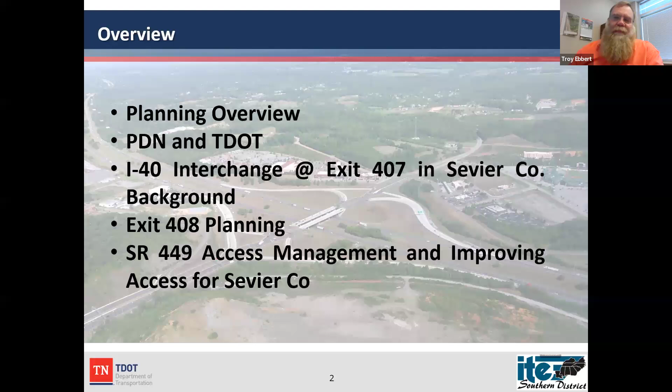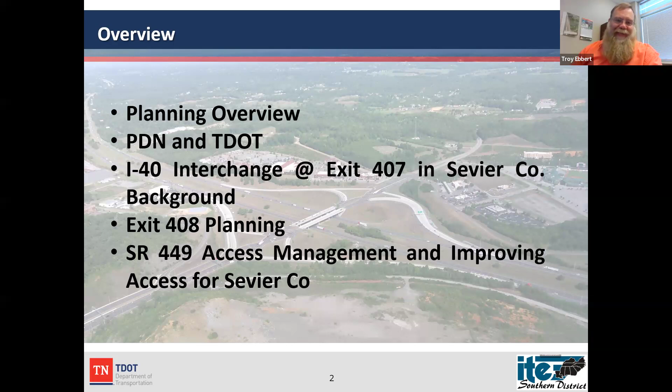So we'll go through this, and if you do have questions, feel free to pop them in the Q&A or the chat. Todd and I will take a peek at those as we go through. In this presentation, I'm going to give you an overview of TDOT just for the Southern District, give you an idea of how we're now organized, where planning fits into all this, and then we'll go through and talk about our project delivery network. Then we'll get a little more in depth on a specific project and how it's morphing into planning for the next project, and then how the locals are actually helping us and collaborating with us on maintaining some of this — that would be the access management part. So it's four different topics we're going to roll through.

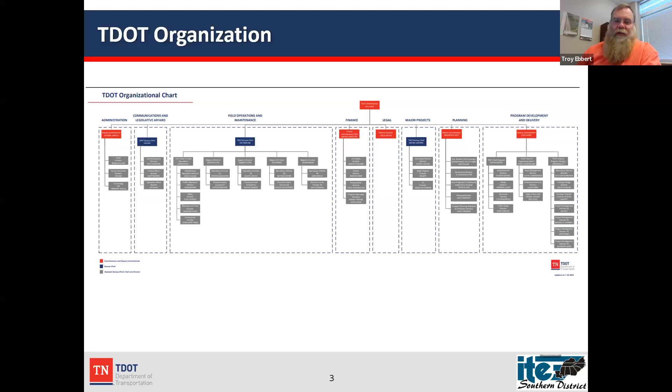This one is specific, Preston Elliott is our deputy commissioner. I am under this part, which is under our planning director, Matt Meservy. Under planning, we also have aeronautics, which was our newest group added during our reorg.

We have our Assistant Bureau Chief, Dan Pallme, who's over Transportation Rail Freight and Public Transportation. Most of y'all probably know Steve Allen, who's now running local programs. They took his division, made it a little different, still looking at community investments, and local programs was slid over there with him. Then we also have our strategic planning, research, and innovation group, that's Julie's area, where our PMs and research division are located under planning.

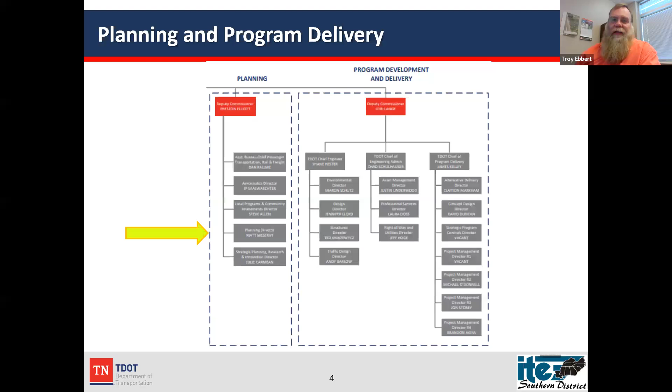So with that, we have IPD and PDN. Okay, we love our acronyms. In the lower right-hand corner, you'll see the QR codes. There's a few of them in here, and I'll leave time up if y'all do want to go to that. That one specifically would take you to the PDN page, if you want more information, more detail than what I'm covering, since I only have a couple minutes to go over each of these.

With IPD, or PDN, the Project Delivery Network, this came out of a commissioner who came in as deputy governor, and he saw issues with how delivery was going. We'd get partway through a project and have to come back and work through these issues. It was very inefficient, taking an average of 15 years to get a project from the very beginning in planning all the way through to the point where we're actually beginning construction. That was too long, and he did not like how that was going.

So this was developed. The more traditional way we did things before, you have your required planning documents, then it goes to design, then to right of way. Somewhere in here, sometimes you'd have a new mayor, or a new vision for the community, and now they need this. Because you may be 6 or 7 years into this point, we've had scope creep, we've had issues, and now we're going to have to come back and do it again.

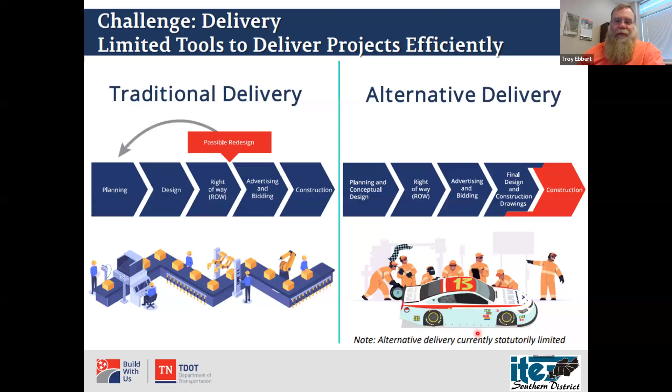Of course, you can't talk about any major development without talking about silos. We're a big agriculture state, but at the same time we get into these silos where planning's doing their thing and moving forward, then design does their thing, then it goes to construction, then maintenance. Maintenance is talking to design about why they did it this way, because there's no way to maintain it. Planning's saying, well, we needed to add this in as well, we needed this particular sidewalk, or the community wanted this, or we have a mayor now more concerned about XYZ instead of what we were originally planning.

A lot of that had to do with time, and of course the longer the projects go, the more expensive they get. So we're trying to deliver projects much faster, much more efficiently, and stay on time, on task, and in scope.

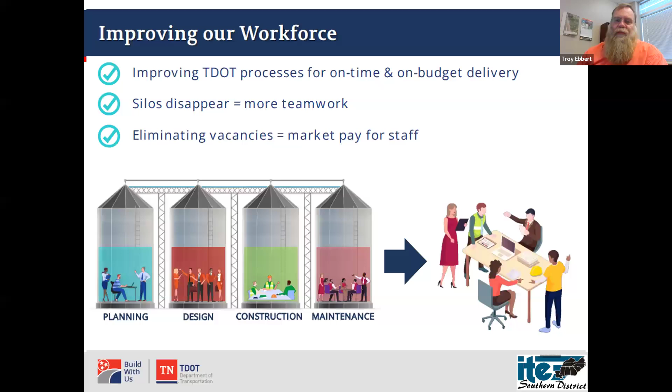So how it was done is we took these silos and rolled them into specific project teams. Now we have a project with technical specialists that go along the whole way through the project. Before, in the more traditional sense, planning would go through all the planning documents, whether within an MPO or outside it, like a bike-ped plan or a corridor plan already in place. Planning would make sure the designers had that, and then designers would take off and run with it.

Now, planning goes along with the project manager the whole way through the project, up to the point we're beginning delivery. That also goes for roadway, structure, survey, all these different discipline divisions that now follow that project the whole way through with the team. So you've got your PM, and then you have the project.

On that project, you have a specific design lead. So if it's a roadway project, typically your roadway design is the lead. If it's a bridge, structures is going to be the design lead. And then you'll have your technical folks coming along with this the whole time.

So if we're working on that road and we know we have a bridge, they're going to be part of it. Survey's already talking to roadway about it, environmental is getting looped in because we have a stream and we're going over structure, right of way is saying here's what's going on, and utilities gets involved. This is all done early because we have pipes hanging off that bridge that are going to come down through here, and we're going to need additional right of way because of slopes. All that's being attacked at the same time and really worked together.

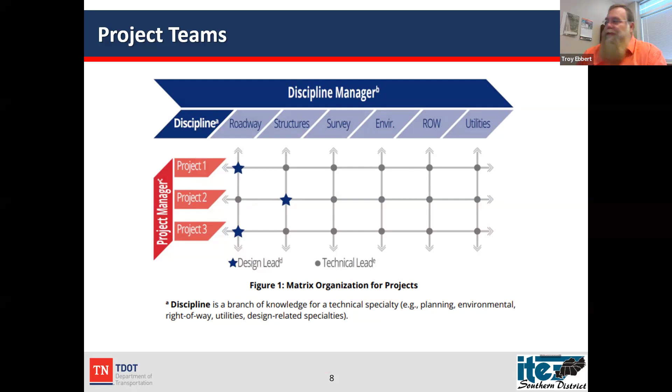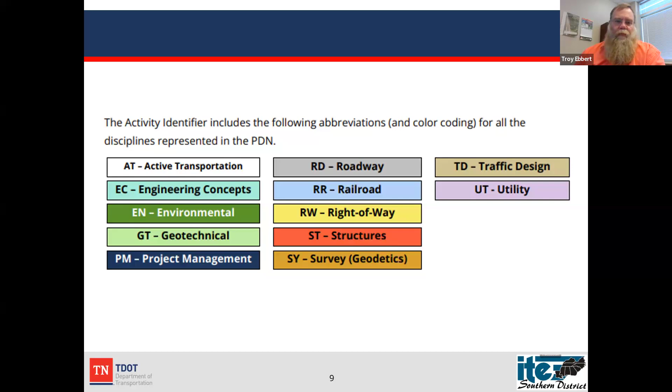There are very specific outline documents that we have to go through as a project manager, and we have templates that are all available online as well. We go through step by step the whole way through one of our projects to get that project from point A to point B, basically from that scoping meeting where we have to scope it and make sure we're right, and then the whole way through to where the right of way and our footprints are there, we have plan in hand, and then we have the PS&E that actually gets moving through. But there's also public meetings during this to gather information.

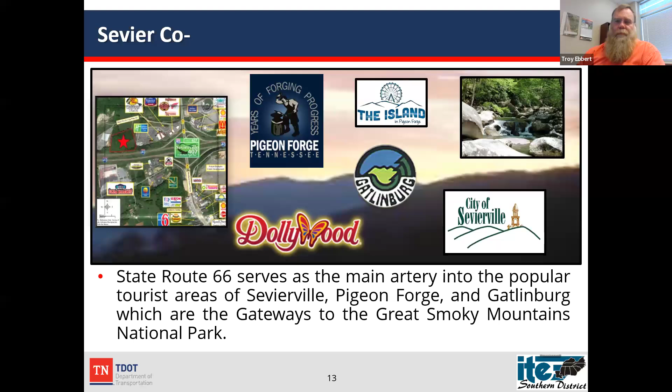So we're going to get into the study part a little bit, and this is more on the traffic engineering side, so y'all are going to enjoy that. There are some numbers in here and a few things. Actually, some of you on the call now actually participated in this as well.

A couple things we're going to focus on: this was a diamond and it had a loop in it, and you see the volumes we had coming up through here. As far as land use, because we're looking at both of these, this is currently vacant in this photo. Bass Pro, a large shopping area here. There's a baseball stadium here. This comes down to a flea market and some other areas, which all kind of come together just off the end of the ramps. You can see the level of service we're dealing with.

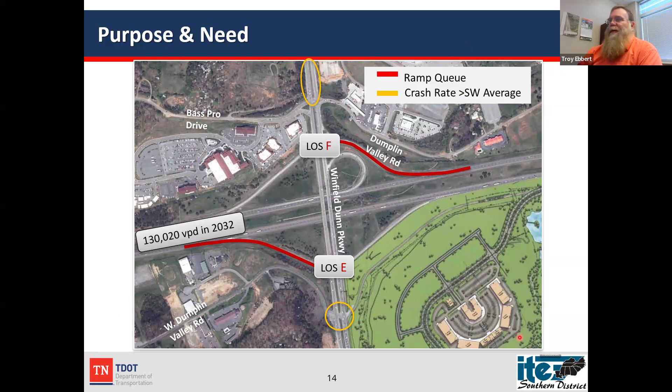And trying to attack this particular project, even on this part, you can see with this diamond, the queuing that's already occurring. We have the heavy tight ramp, and then you have this heavy queuing here. We're also looking at this tapered ramp that comes up, and we have 2 right turns and 1 left that's coming out here, all signalized on your basic diamond.

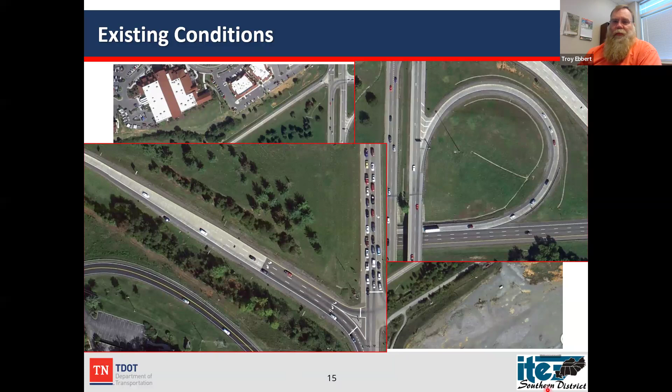Here's some more numbers for you. As you're coming up through here, there was actually queuing going down the interstate. One thing about transportation models and transportation planning, this specific area does not model like most towns or cities. You have your normal 9 to 5 traffic coming in, but your peak times are more Friday afternoon, Sunday morning because of the tourism side. So it creates a very unique challenge in trying to even model this.

We had queues running down the interstate, whether for the ramp or in this particular lane, the entire way down, causing issues anytime you're queuing up on your main line. We had it coming from both directions. You can see the traffic counts here - projected traffic count for 2032 was up over 130,000. We are already queuing out here, and we are only in the mid to high 70s.

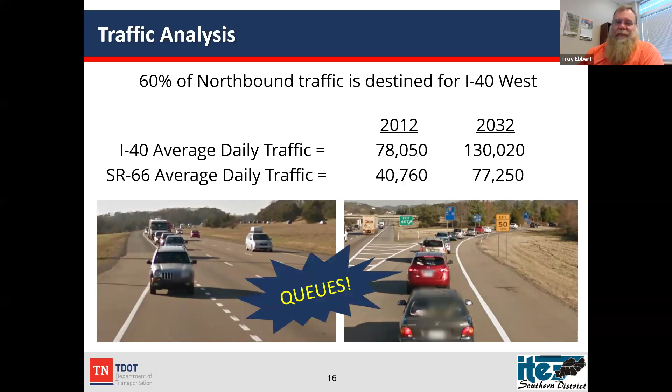So a ramp study was done. The results of the ramp study looked at expanding to be able to control these queues. With these, we were looking at the heavy right - most of the traffic was going towards Pigeon Forge, Gatlinburg, Sevierville, and the Great Smoky Mountains.

That's why you see the heavy right turns, and then the split here to go left up to the baseball stadium and to Bass Pro and some of the other attractions. Of course, the baseball stadium is somewhat seasonal, but they also have events there in the winter, like Christmas lightings and holiday themed events, in addition to the other main events they have.

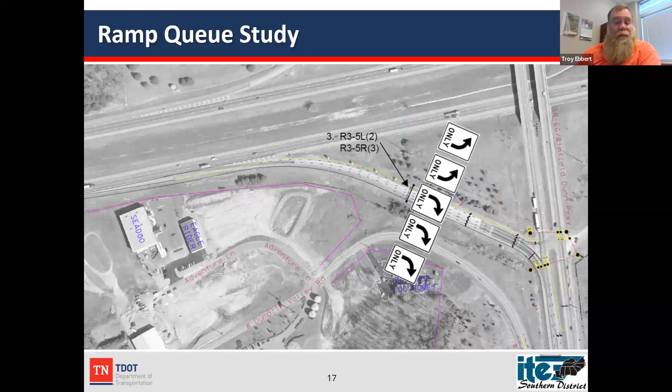So this was working, but we knew this wasn't going to work out based on the ramp queues. So we came through, and again, this is back to our traffic division. They looked at this and looked at a few alternatives to handle this kind of traffic.

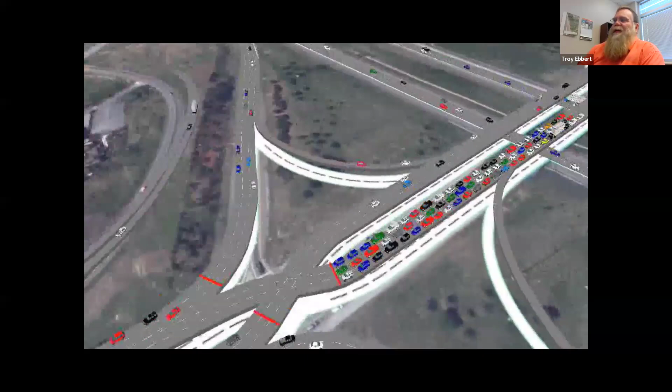This one specifically is looking at the DDI, and this is a very large divergent diamond. And we're talking 2015 - we don't have a ton of them in the region at this time. So videos like this, and there was a lot of outreach going to folks to show them how this is going to function.

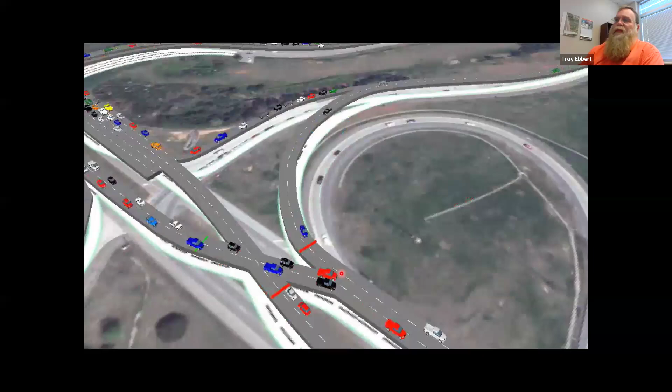You can see the overlay here of the former ramp, how it was working, and then what was done to complete this. You see the additional lanes ended up being 3 going each direction as you go across this.

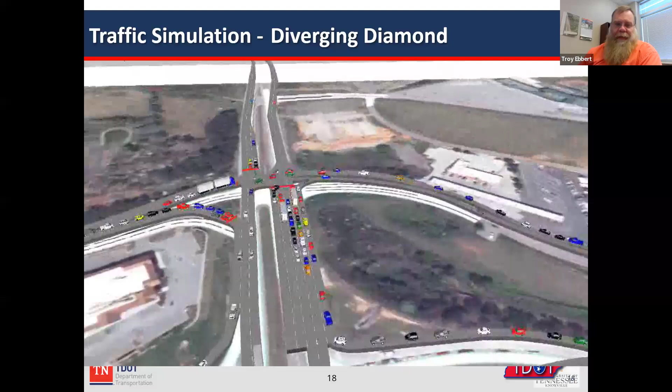And this was a hot topic for a while. Everyone was saying, what in the world is going on here? You get off on this exit ramp, you're going the wrong way. Well, yeah, you kind of are. But once they figured it out, it does function very, very well because of that.

Now with this aerial, we're pointing out, you know, with our cycle we've gone through, the LOS has been studied, it's been adjusted. Now we're going to come back into some land use.

So I want you to notice this particular big empty piece of property right now. We still have Bass Pro heavy shopping over here. This is now growing up with heavy residential. And we have some major growth that will be going on over here at the baseball stadium. Even though the baseball team has moved downtown Knoxville, which is out this way, we have a lot of other potential that's coming up on both of these sides.

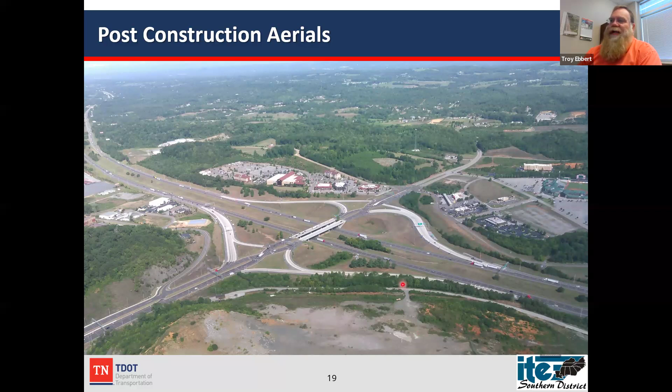So this is working great at the moment. It's not going to continue to be able to last that. We're going to come up with a strategy to try to preserve how it's currently functioning. So this was the timeline that went through on this particular project.

This was not a major corridor project like what we're using with IPD, but this was a heavy interchange improvement. You can see 2014 when construction began. It actually kicked over in mid 2015. So roughly 15 months later, it went from the diamond with a loop to the DDI right before the 4th of July. Everything was closed out at the end of 2015.

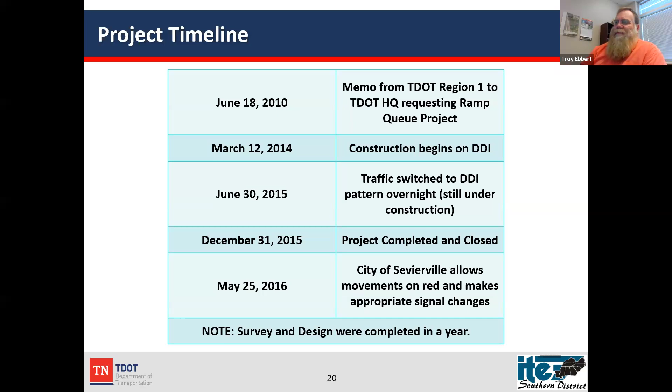There were a few changes the city of Sevierville wanted to deal with, specifically permitting right-hand turns on red versus making them wait for that traffic to go through. And one note here that our traffic division has put in as well is that our survey and design were all completed within a year.

So here's your engineering slide, because I know you all like numbers, and we like to look at these values at the bottom. When you look at this, it's pretty cut and dry.

The total crashes, as far as safety improvements we looked at on this, dropped from 111 to 73. Roadway departures went down - those are your more serious issues. We had a few upticks on it, but the rear end crashes went down. A lot of that had to do with the sweeping turns where you're looking back over your shoulder - you're not having to deal with that as much. And then you just don't have the conflict points because you go from a diamond to a DDI.

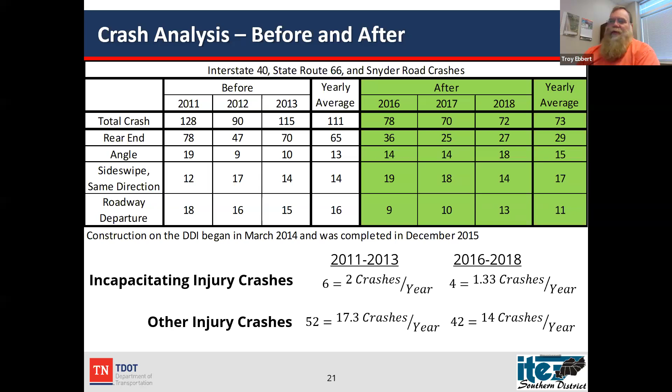Severe crashes dropped from 6 to 4 during the similar time period, as well as the other injuries dropped by 10 during that same time period, the non-incapacitating ones.

So now we've gone around the circle. We had increased traffic - you saw the LOS that was a problem. We needed issues, made improvements, increased accessibility down through here. Now that we have more increased accessibility, land values are already high and it keeps climbing. Well, now we're back to here. So we're doing a land use change.

So that big empty spot that I was looking at didn't stay empty for real long. As you can see, this tiny little gas station showed up - you're familiar with Buc-ee's - but they came through. Of course, they were the largest gas station. This was the largest one at the time until they built the new one in Texas, but being a tourist area, this was a home run for them. They see a lot of traffic.

Now, one thing that did happen with this as well, of course, we have a wonderful traffic division in Region 1.

They heavily coordinated on how to open this up and keep this moving, because down below, what you can't see is it's a new interchange with signals. We didn't have the crazy heavy queuing on the interstate like we did on another Buc-ee's that opened up in a different area that did not have this kind of interchange. This interchange is functioning very well because of a lot of that and the forward thinking of our group.

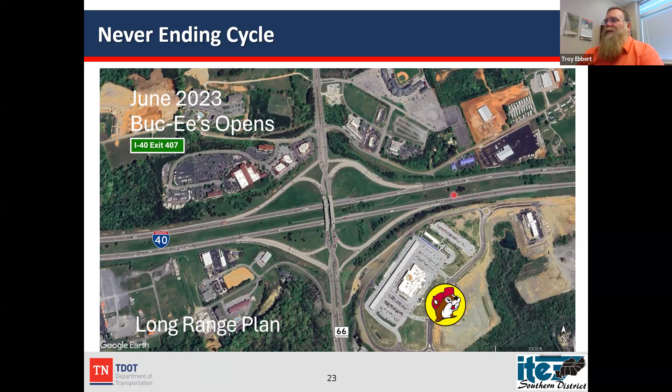So this is an overall arching look at what is going on in this region. Of course, as far as orienting you, this is the exit that we were just looking at. This is State Route 66, which brings you down into Sevierville, which takes you on down to Pigeon Forge and then all the way in through to Gatlinburg and the Great Smoky Mountains.

This road, State Route 449, if you've ever been to Dollywood, you've been on this road, because that's the road you come in and out on, whether entering this way or coming out the other way to the parkway, you have hit State Route 449. State 449 used to be the back way to Dollywood that all the locals knew how to get around through and didn't have to deal with all the traffic out on State Route 66.

State Route 66 is a divided road, 3 lanes each direction, lots of curb cuts, lots of signals. Great for cruising with the rods and the car shows, but not so much on throughput. State Route 449, on the other hand, is more of the expressway to Dollywood and to get about halfway down through this region. It is 6 to 7 lanes, depends on where you are. Some are divided, there are portions with a center turn lane. And I'm going to talk about access management along that here directly.

Because this is already getting full, we have started looking at another exit. So that little road I was talking about here, this is Buc-ee's, and this little yellow line here, that's the future connection to exit 408.

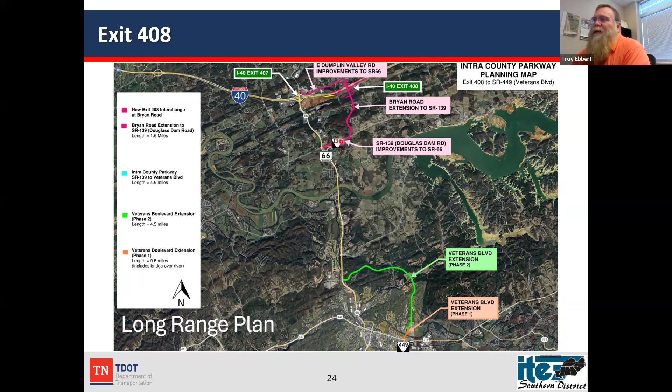I'm going to tell you how we're getting all this and paying for all this here in a minute. And exit 408, this is about a little over 1.5 miles for improvements on this road. And the rest of the story on this is going to be this connector here. So currently, this is what planners love to do, and I particularly enjoy putting a line on a map and letting the engineers figure out how to make it work.

This has been planned, but also has been through some preliminary engineering as far as trying to find good locations, hook up on roads that we already have, and do improvements on those with the least amount of disturbance possible. This is almost a 5-mile road. We'll most likely have a pair of bridges, and these are going to be significant bridges going across here.

This is the final plan, the big plan, overarching plan of what we're looking at versus what has already been funded and what we're moving towards.

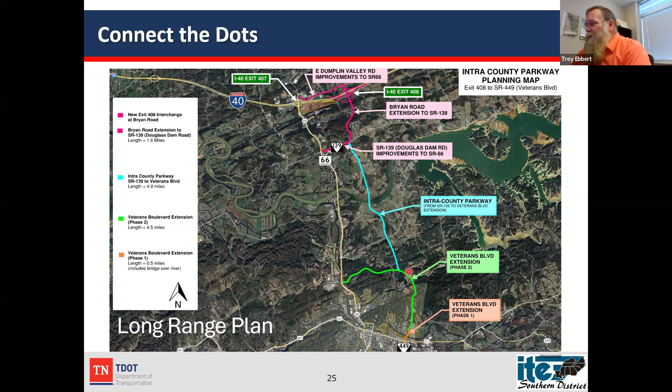So, long-range plan, Sevier County does have a long-range transportation plan. They have a consultant that they've been working with for years, and they have had their plan. They have updated their plan to include these. So their plan includes exit 408 here, and the intra-county parkway, which is this section here.

Of course, the Veterans Boulevard extension, which is this portion. And this is 449, which takes you straight to the front door of Dollywood here.

Then it comes back to 66 and runs in. So you can see the overarching part of this is this road, 66, is still going to be there, but this is going to be a much more somewhat access-controlled right of way and corridor, and we're going to get into that specific.

But right now, some of these projects have already been funded. We're going to talk about the funding as well. So exit 408, that was studied with private dollars. That was not studied with state or federal money. That worked with some of the local potential developments that are coming in or could come into that area.

And the committee, which consists of one elected official and then the city managers, so 5 total. And then the 449 extension here, it is also funded. It is in our 10-year plan for both of these.

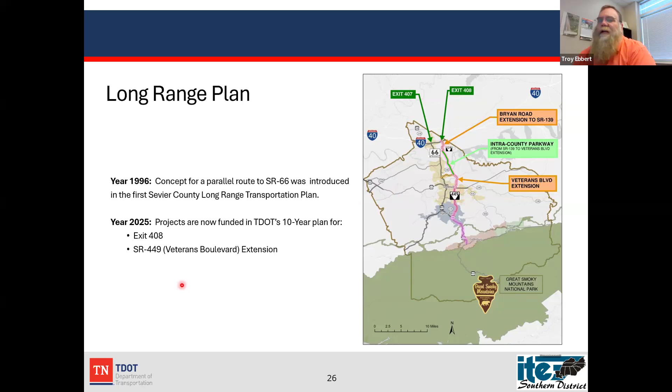And I started getting into it a little bit. How did they do all this? Because money's tight, it's tight everywhere. How are we working through this? So heavy collaboration, obviously great planning, and then this Tennessee, or the TDOT statewide partnership program, are a couple ways that they have tackled this.

So this particular area, if you're familiar with transportation funding, is not within an MPO, so they don't have STBG money that they can work locally on these projects. They do make a lot of tax revenue for the state of Tennessee, and they know it, and they're not afraid to call that in and let them know. With between 18 and 21 million vehicle trips coming through there and visitors, they're spending a lot of money in this region.

So the collaboration consists of the mayor of the county and then the city managers. They get together, and they've been doing this for years, and they have some very successful stories that come out of it. When you're dealing with this many people coming in all the time, you have to have really good basic services.

A lot of hotels, a lot of restaurants, you're dealing with a lot of water. Their committee discusses their water, wastewater, stormwater. They also discuss waste management. What are we doing with all this trash? What are we doing for all the food waste that we have? And of course, traffic.

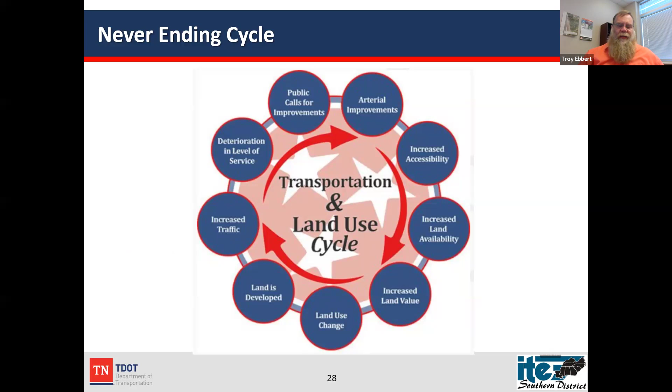But what they have done on that southern section of 449 is they have actually created what's called a corridor management agreement between these cities. These cities work together, they don't fight over development. That's the biggest thing I've seen that's been so impressive with them - they come through and they collaborate. You have multiple agencies; on this particular corridor management agreement, it's Pigeon Forge and Sevierville today. They don't fight over development, they work well with it.

So if a builder goes to Sevierville and says, hey, I want to build this, and they're told no, the builder might think I'll go to Pigeon Forge - but they're going to get the same answer in Pigeon Forge as they are in Sevierville because they're talking to each other. That helps stop a lot of the playing them against each other, because they're all working together as a single entity - Pigeon Forge, Gatlinburg, Sevierville - all of our cities within this realm are working together, we're all rowing the same way and we're making progress.

So what the CMA does is help manage the operations of this corridor. Now it's still a state road, but as far as accessing this road, we're tying land use and transportation together to make sure this specific corridor is protected. We've invested a lot of money on 449 as a state agency, and in that southern section, we want to make sure it continues to work.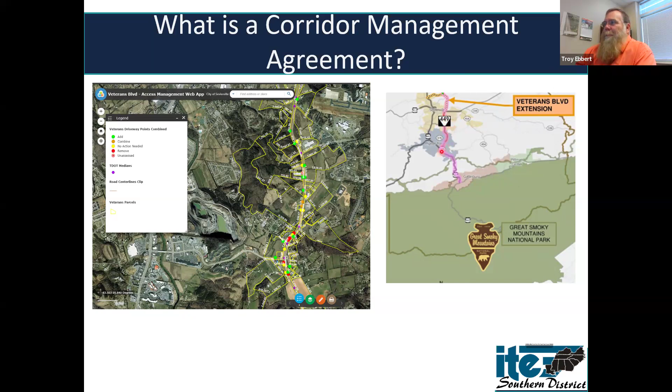So we're talking about this section of 449 right here. I'm going to zoom in a little bit and give you some examples of what we were specifically looking at. So these orange dots are all driveways. You see the wide right of way here, and parking down in the right of way, trying to eliminate that. But at the same time, these entrances, when this land is developed or redeveloped, are going to have a single entrance instead of multiple.

We're not going to let them have unchannelized entrances as well. These here are the same way. You have access to these two properties, and we're going to put them together. We've actually had that, and I believe it was this one—these three properties were put together. They did a mountain coaster here. The curb cuts are actually in place, but the way they built it, they put one on one end and one on the other and got rid of the one in the middle. And of course, with fewer conflict points, you have better traffic through here.

But that's how all this is controlled. These red dots are all the ones that are coming out—they will not be able to access their property with these red dots. The yellow dots, they're already there, they're in good shape. We didn't have to make any changes on those.

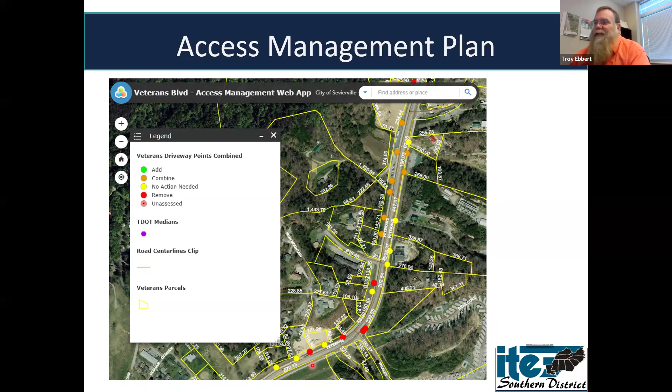All right, coming down through here. So with the CMA specifically, we're looking at land use, transportation, how we're working on this together. Of course, the corridor management links transportation directly to land use. It makes the land use planners think about it. And the planning—there are planning commission members on the CMA board.

And the really nice part about this is they came up with it. They took it back to their local jurisdictions. They were the champions pushing these regulations through to get them adopted, and took it through with their attorneys and were able to adopt some of these into their other regulations. One was to be able to make this much more enforceable. But we're protecting our transportation system.

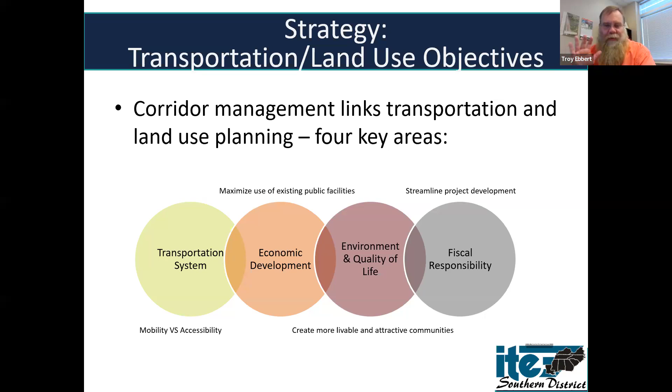Of course, it improves economic development, quality of life, and fiscal responsibility. We know as long as this is managed correctly, and we're not giving curb cuts for every single driveway down through there, but we're making them plan and think about it, then they have much better fiscal responsibility, which means we're not going to have to worry as much about capacity on this road because we're going to continue the throughput.

So next steps, we're getting towards the end here. I do see one question here—I'll get to it, it's about PDN—but we have the CMA next steps. The committee is looking at expanding the access management plan and doing an additional plan for this, which will include additional roads. We have a new connector road that was recently opened for us, and that will be added on, looking at the access on that road to ensure it will be controlled similar to what we've already done on the current 449.

Part of these corridors are also in the county, so Sevier County can be added as a new jurisdiction. The board's going to have to grow a little bit. But now you've got two cities and a county—they're going to be looking at development, comparing notes, and you get back to that: 'Well, the county's not going to make me do that.' Well, yeah, they are, because we're all talking and we're all working on this together.

And then, of course, the new sections of State Route 449, the whole way up to exit 408 at some point—that will all, the goal is to have under control of the corridor management agreement and the CMA's board, to make sure that all that information is out there for the developers.